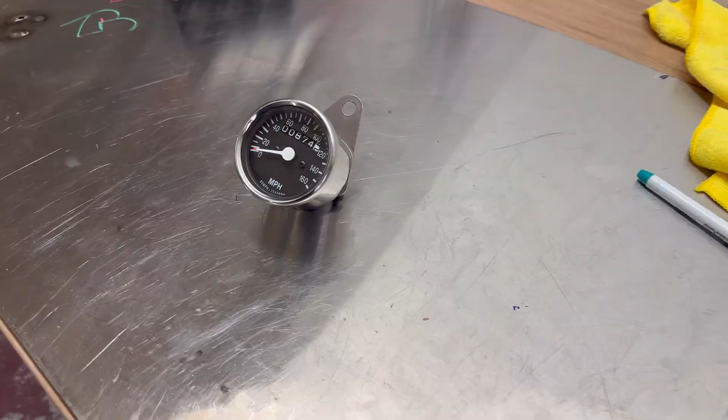Welcome back. Today I'm going to be relocating the Speedo, and beforehand on the old risers I just had it on one of the riser bolts and it sat just around here. It does normally have a backing light. I'm not going to run it, I'm just going to keep it standalone.

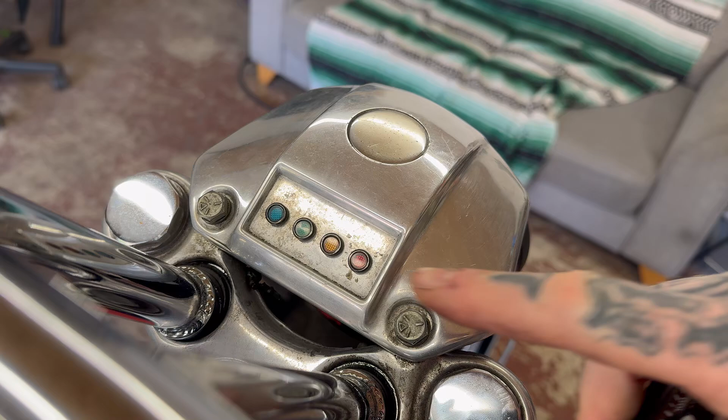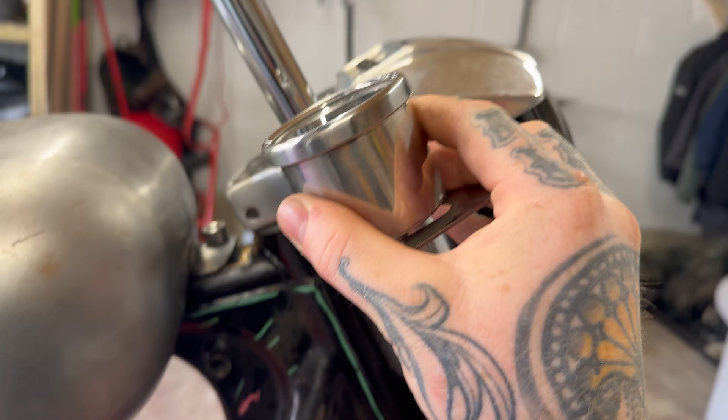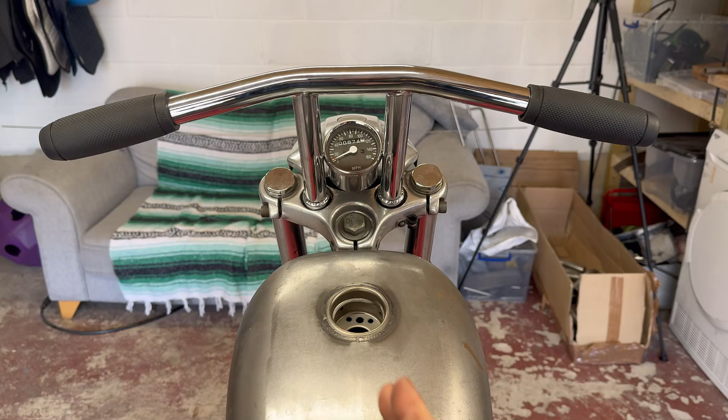And essentially my little idea is, because I'm not running any indication lights, I'm going to try and notch this out, well, get it cut out, and we're going to try and sit this into here. But we're going to try and get it so it sits nice and flush. And my theory behind that is, when I'm on the bike and you're looking down nice and central, everything's just super even and aesthetically pleasing, and little details like that go a long way. So let's get at it.

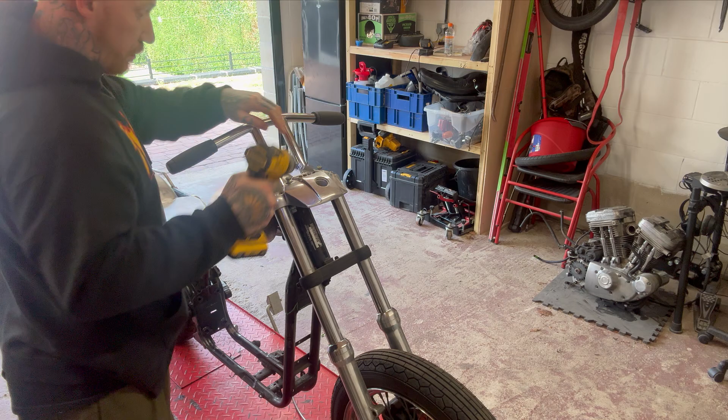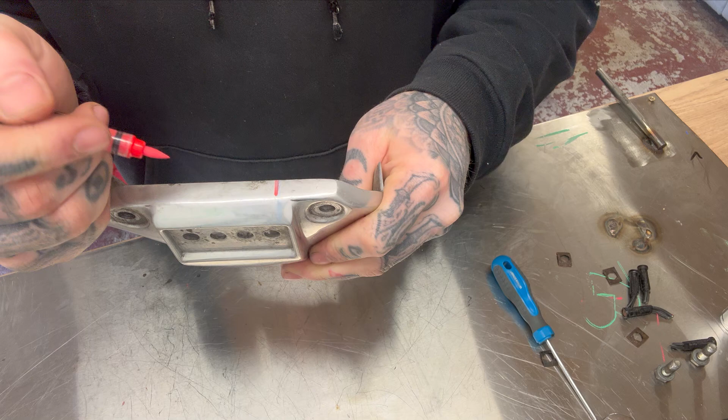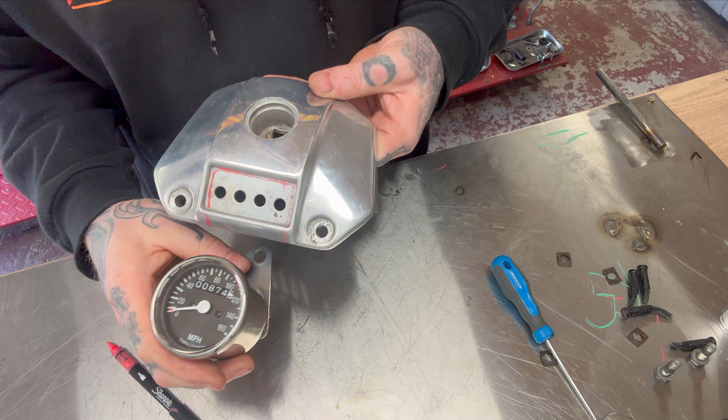So essentially all I want to do is use a pen that actually works. Will you work? You do work. Yeah. So I'm going to cut all this section out, smooth it off and get it all polished up eventually. Boom. Get this cut out and hopefully set this in here and get it nice and flush.

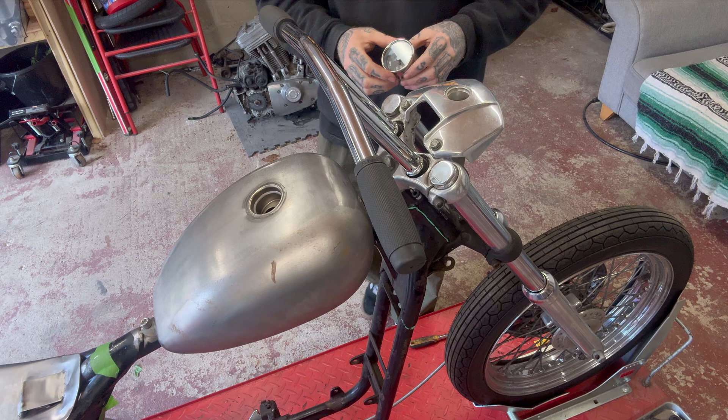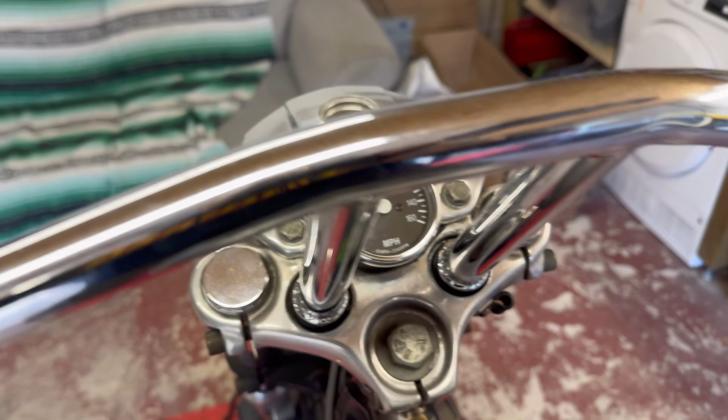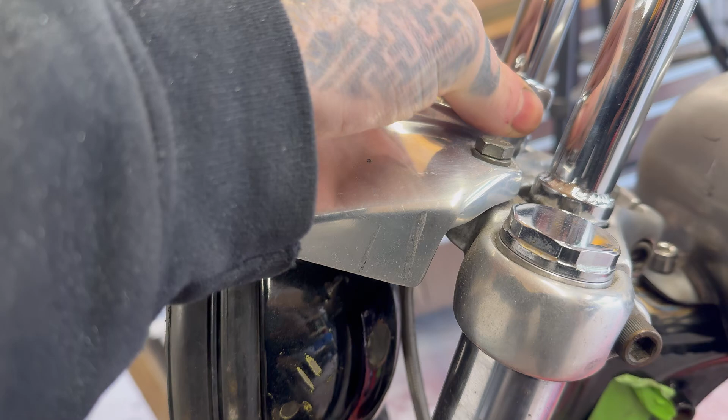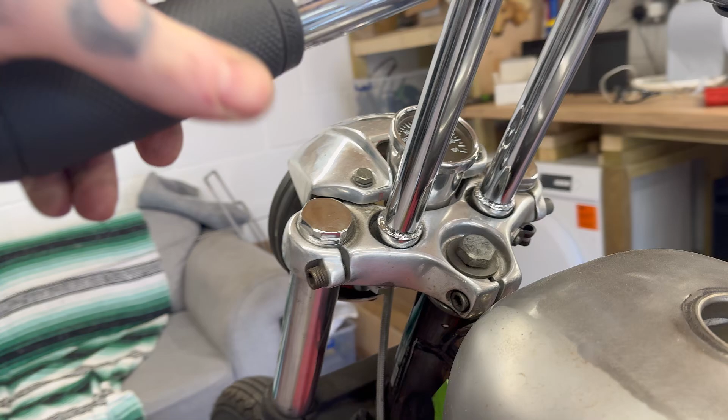So what I've got in mind, my only issue is going to be the Speedo cable and my headlight positioning, so I might sit it up a little bit further and maybe give it a little tilt forward just to give it a little bit more clearance so we can get the headlight in maybe a better position. But I kind of like it, a little bit goofy, but I want to keep it because we have tons of speed cameras and I do a lot of city riding, so we'll keep it in. But I think that'll look cool.

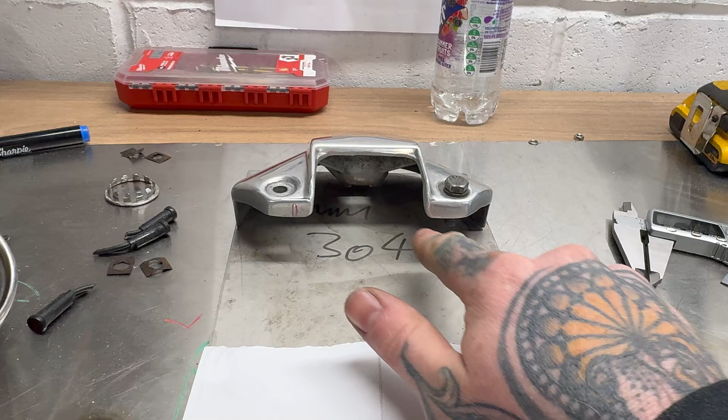So I've got my little template finished, and this is just going to be a very simple bracket that can run straight across flat, because looking at it, to dodge the Speedo cable and give us a little bit more wiggle room, it would actually sit pretty much in line. So I'm going to get that transferred across from here onto here. I've already got my centre punch marks ready.

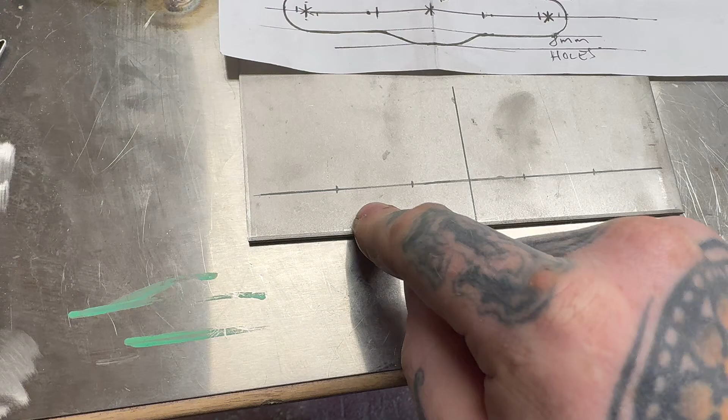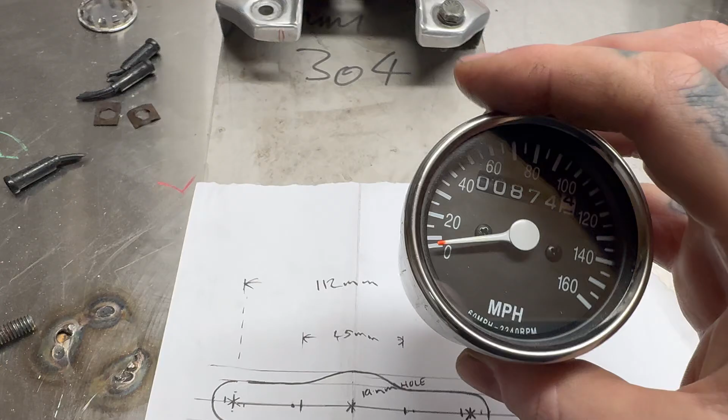I'm going to get it drilled, then I'll get this template roughly around it, but we're going to do 18mm across and just taper it over a little bit where I'm going to run a 10mm hole, just so we've got plenty of clearance around where the Speedo cable goes. You get what I mean. Anyway, next.

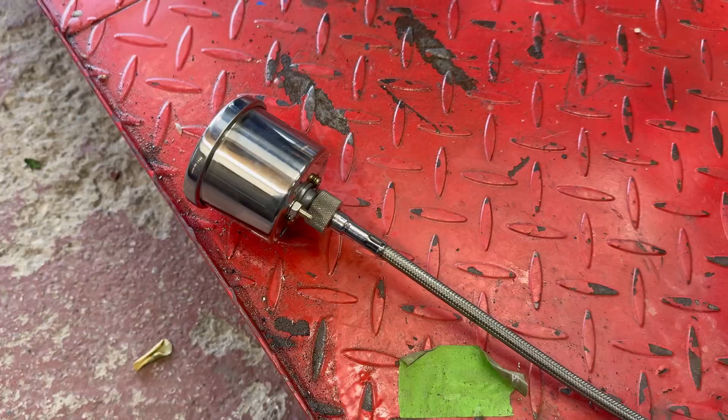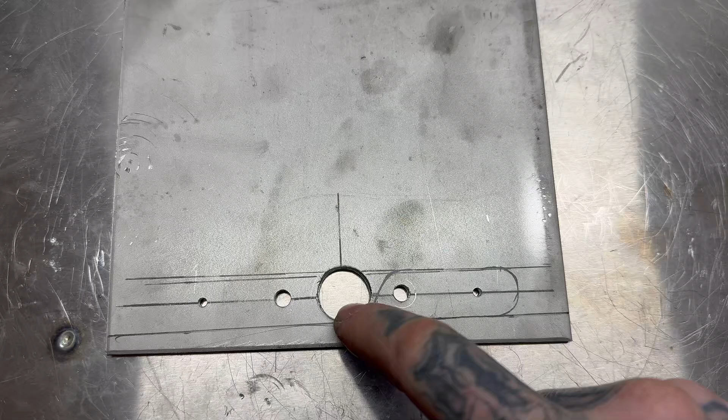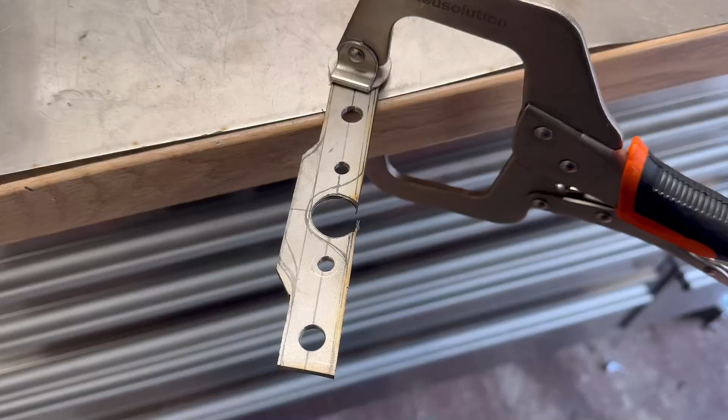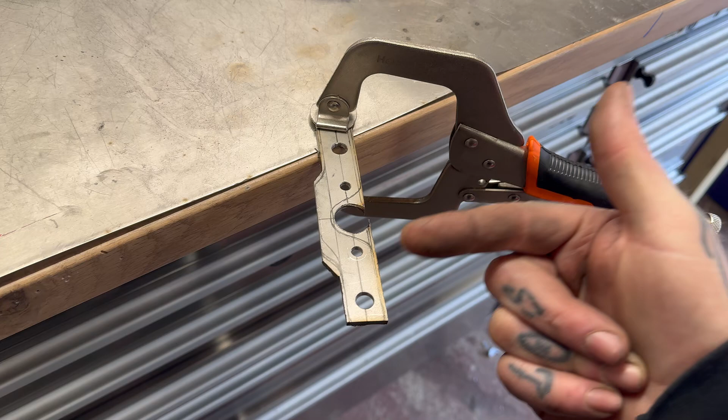I haven't filmed myself painfully cutting it with a cutting disc and a hacksaw. One, we need to invest in a nice good pillar drill. Two, we need a bandsaw that we can use vertically as well. That would be fucking handy, but we're making do with what we've got so far. So next I'm just going to get it shaped up with a flap disc, and then we'll get it all polished up.

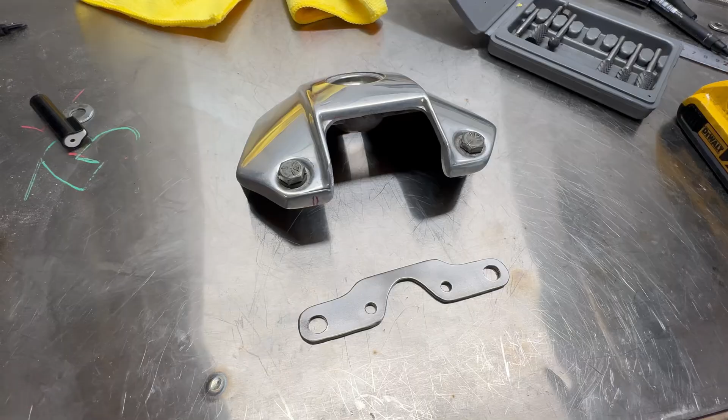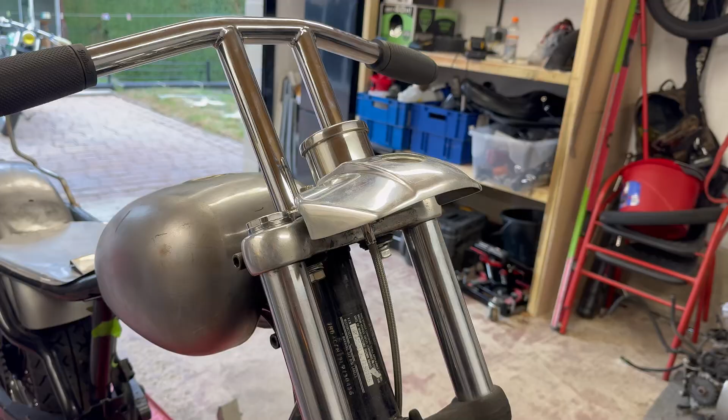Got it done. Quick little polish, nothing special. Let's get it on the bike, see how it is. This is how we're looking. That is literally not fucking going anywhere. Oh, that looks tidy. I'm happy with that. That's how it's sitting underneath.

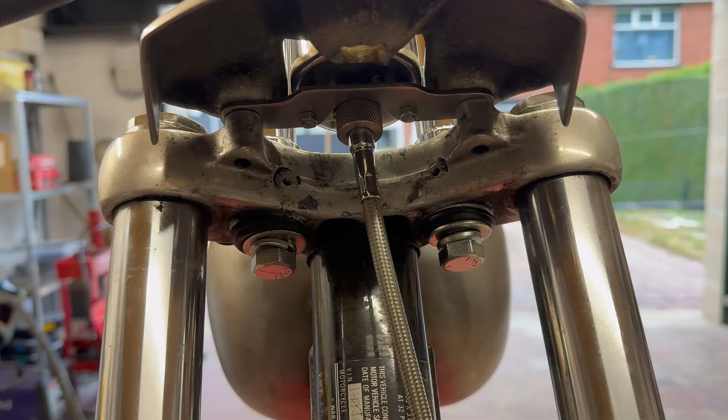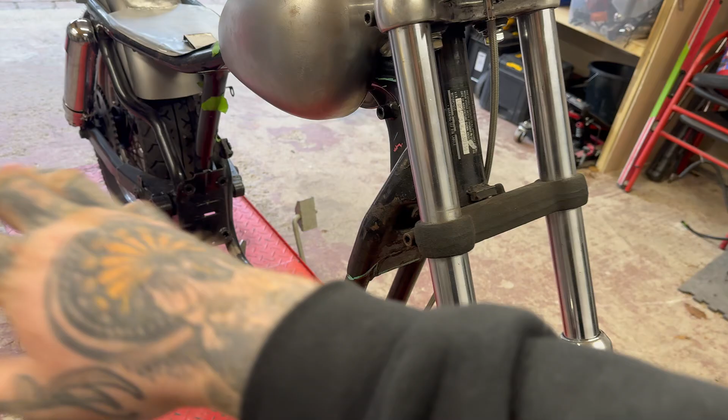We'll give this a good polish in the future. Same with the actual little headlight visor. But I'm going to wait until everything's off for painting and everything's disassembled, and, you know, when I can get around to doing the forks. But I'm happy with that.

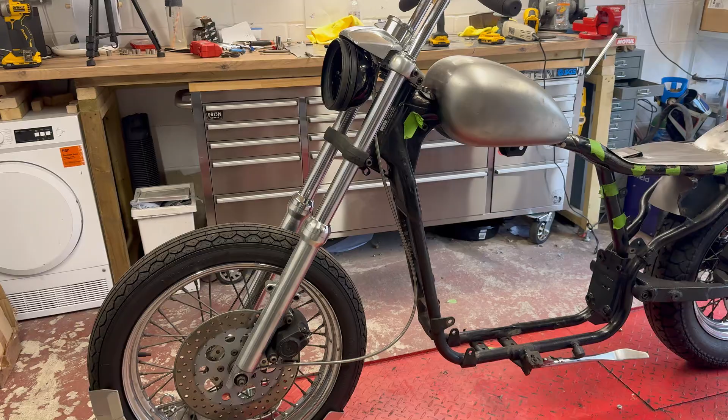Try and get a short one. Who knows?

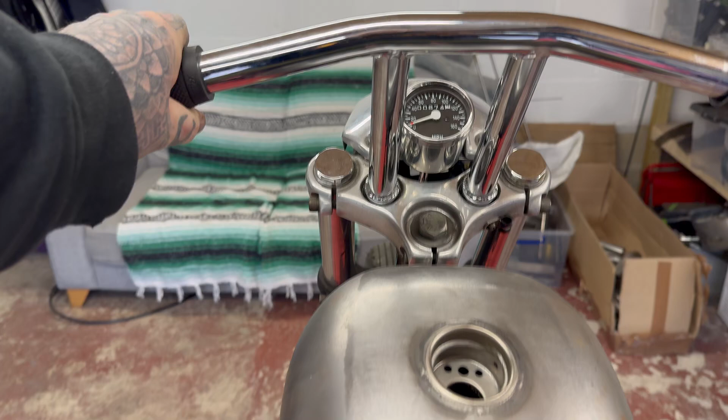Tidy. Happy with that. Let's get it ticked off the list.